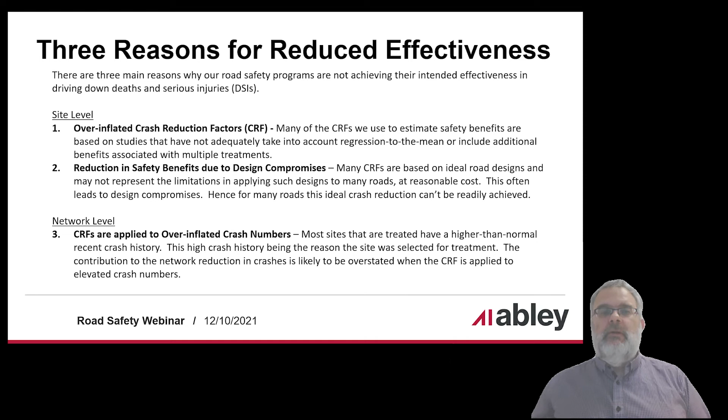And the third issue really is more at a network level, in that CRFs are applied to overinflated crash numbers. So most of the sites that we identify for treatment have higher than normal recent crash history, and we know that due to regression to the mean, the crashes will go down at those sites anyway. So while we might claim quite big reductions at those locations, they may actually overestimate the contribution that the treatment of that site makes to the overall network crash reduction, because we haven't adequately dealt with regression to the mean.

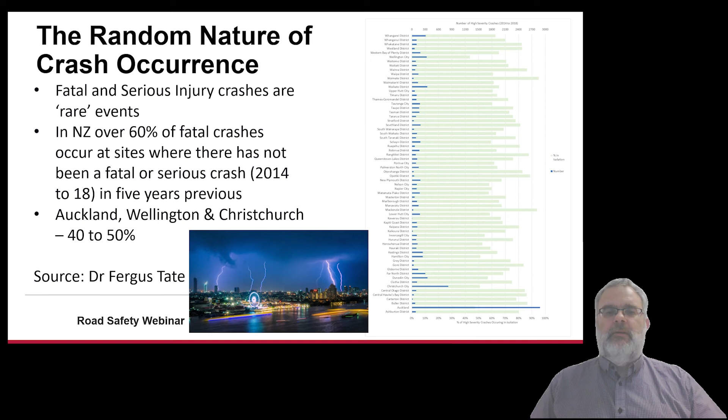So I think it's good to reflect on the fact that crashes are very random events, particularly the more severe, fatal and serious injury crashes. And so we know from some work that was done by Dr. Fergus Tate that in New Zealand over 60% of fatal crashes occur at sites which had not had a fatal or a serious injury crash in the 5 years previously. You can see that on the right-hand graphs. Other than in cities where we have some quite major intersections where we do get repeat crashes occurring, across the network a lot of our fatal crash sites appear like lightning bolts at sites where we haven't in the past necessarily seen a problem in terms of crashes.

And so we are sometimes overestimating the benefits of crash reduction measures, treatments, because we are only looking at sites which have high crash rates when we assess the benefit of treatments, and often we are applying a reduction that's unrealistic.

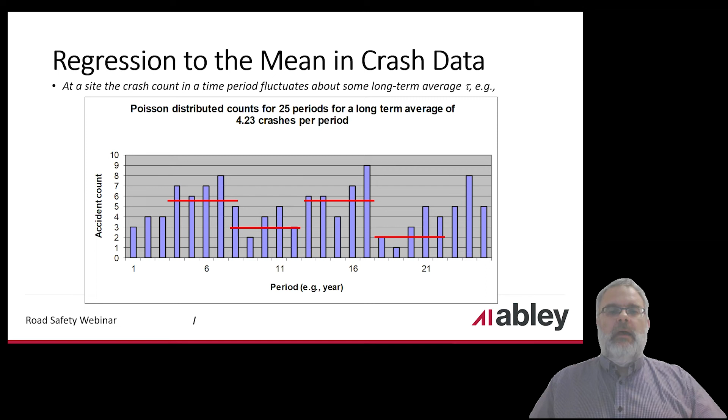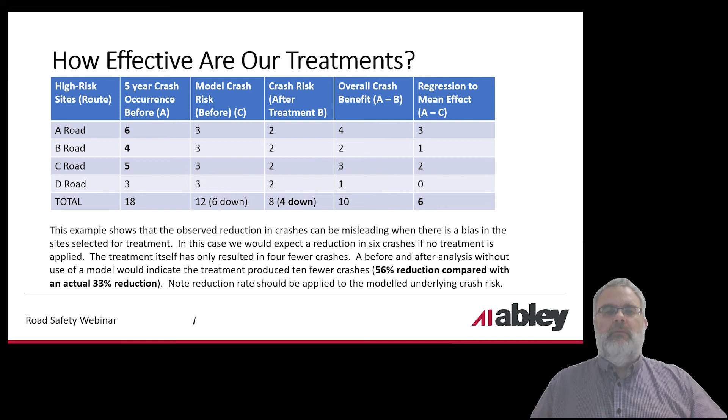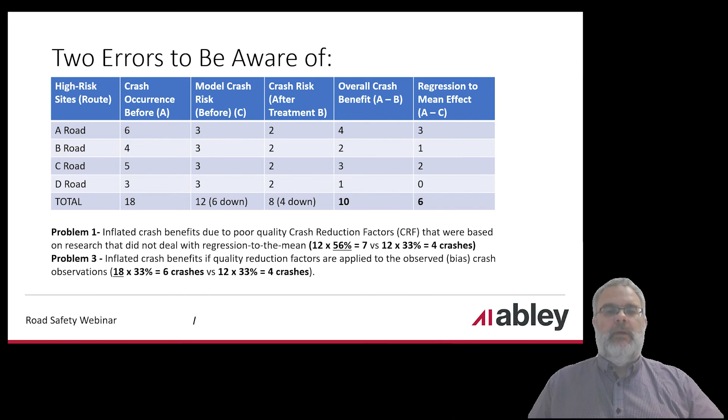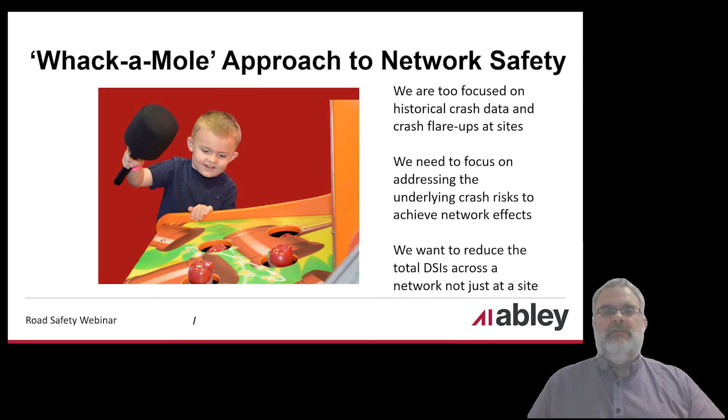And the best way to do that is to use some type of modelling method to try and understand whether the observed crashes at the site are realistic for that site, or we're seeing an overinflated number of crashes because of regression to the mean. Because overall, we want to reduce total DSIs across the network, not just at each individual site. We want to see the fatalities and the serious crashes coming down, and ideally to zero eventually across the network.

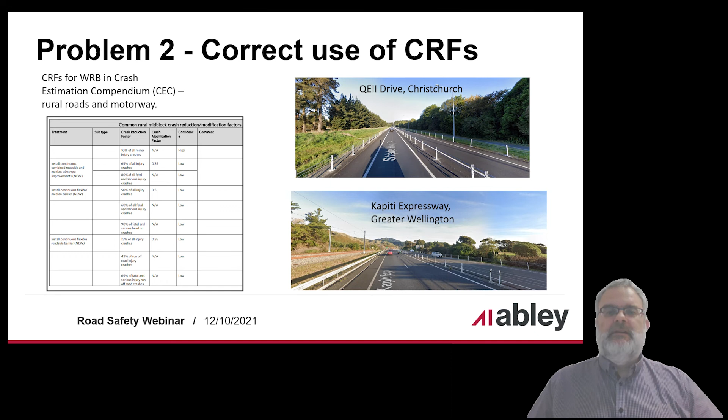And we have these reductions for putting in wire rope for median barrier and shoulder barrier, and really those reductions do apply to sections of the network where we can have continuous median and shoulders, such as QEII Drive here in Christchurch and the Kapiti Expressway up in Wellington, where there aren't accesses and intersections through that section that require you to have a gap in the median or install a major intersection.

But in reality, what we do have is locations where we do have gaps in the median, and we, for various reasons, don't put in a roundabout or some other form of control. And therefore, if we assume that we're going to get continuous benefits from a median barrier through here, we haven't really identified that there will be a reduction in the benefit and the applied crash reduction factor because of the gap in the median, and vehicles could lose control and go through that median and have a head-on crash.

And does the crash risk increase at the intersection, potentially associated with the fact that we've got a median now? And will people be U-turning through that gap? Now, in this case, the facility has been designed to allow U-turns, but in a lot of cases, it hasn't. So ideally, at all these locations, we have roundabouts, but it's not always practical to do that. And where possible, we don't have gaps in the median, and we use roundabouts or U-turn slots to aid people to access side roads and access ways.

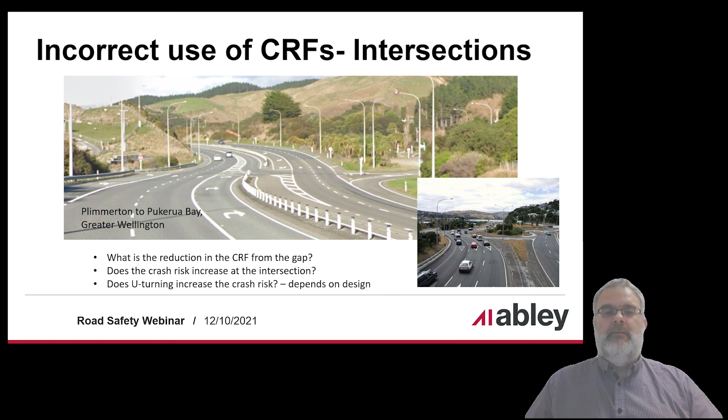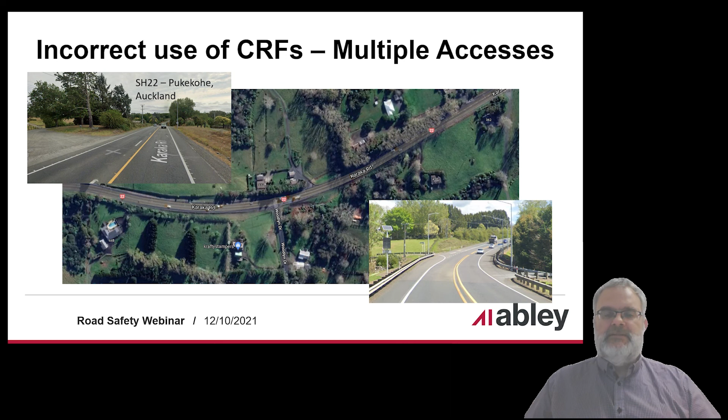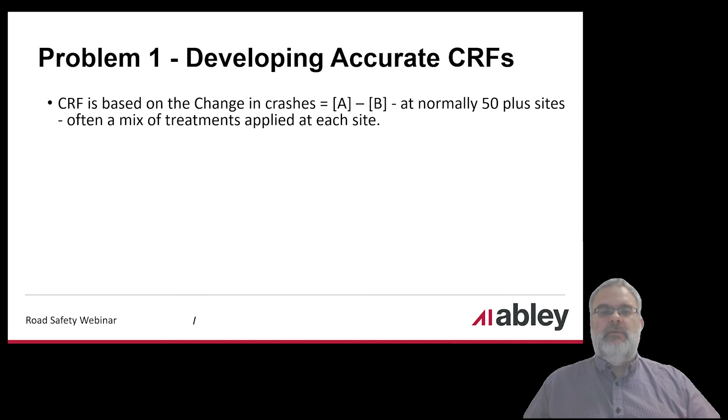So in terms of developing accurate crash reduction factors, it's really important that we use quality before and after studies. So what we're trying to do in these before and after studies is look at the number of crashes that would have occurred at the site had the treatment not been applied, and subtract from that the number of crashes we did observe at the site. And ideally, you have at least 50 sites that you do that assessment at, and then often there is that complication that you may have a mixture of treatments being applied at a site, so that your reduction observed through the analysis may not actually be just because of a particular treatment. It's probably going to be overestimated if other treatments are applied, and they have their own benefits.

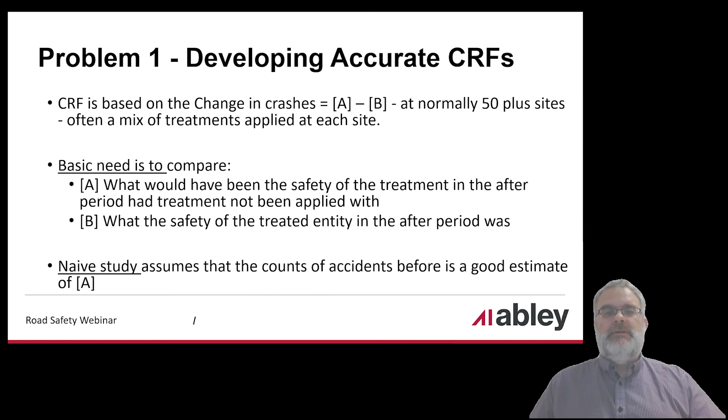So the basic needs in terms of doing the studies is what would have been the safety in the after period had treatment not been applied, and we need to know obviously from the crash record and have enough years of data what the safety effect was in the after period. Now, in a naive study, we just used the crash period in the before case to represent what would have occurred at the site in the after case. But of course, what happens in the after case may be influenced by an increase in traffic volumes or bike volumes, and this regression to the mean effect likely will have occurred in the after period. And so some of that reduction that you'll see if you just use the before data as an estimate of the after data will be due to regression to the mean if you're looking at high crash sites.

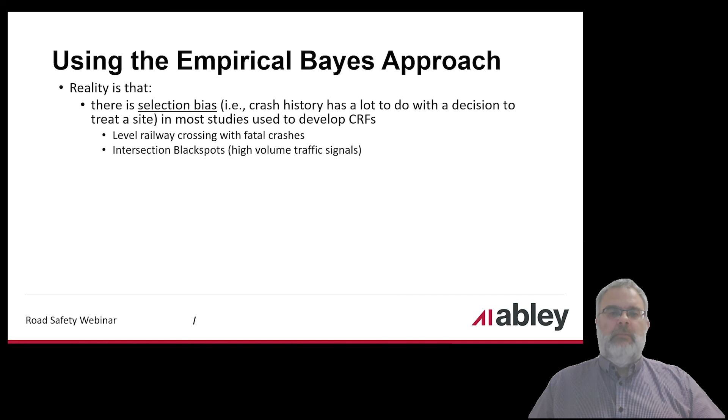So we do have this selection bias, where we have these high crash sites that generally have crash rates much higher than what we would expect at these sites, and so we do have that regression to the mean effect. And these things happen at maybe intersection black spots and at level crossings, where fatal crashes are quite rare. So at the sites where they are occurring, that crash may not reoccur every 5 years for the next 25 years. It might just be a 1 in 50 year event.

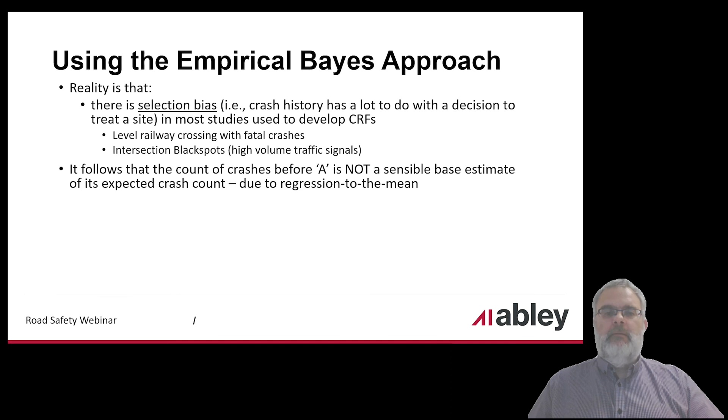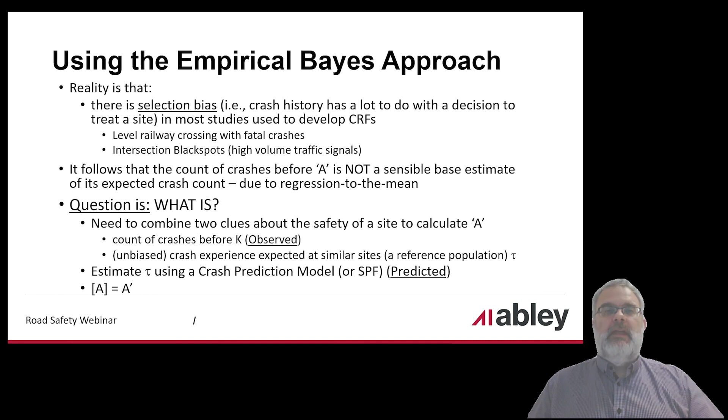So it follows that the count of crashes in the before period is not a sensible base estimate of the expected crash count in the after, due to regression to the mean and changes in traffic volume and bicycle volume in the after period. So what is? Well, the way we do it is we take both the observed in the before case, and we also use what we'd expect in the after case based on similar sites. We're using a crash prediction model or safety performance function, combining those two bits of information together to estimate what the number of crashes might have been in the after case had the treatment not been applied.

Now, why don't we just use the predicted frequency? Well, there may be factors at that site that are reflected in the crash history, and therefore the underlying crash rate may be higher at that site than all the other sites that have that similar volume and characteristics. So we do acknowledge that some of the increased crash risk that you observed to be above what you predict or would expect may be due to site factors.

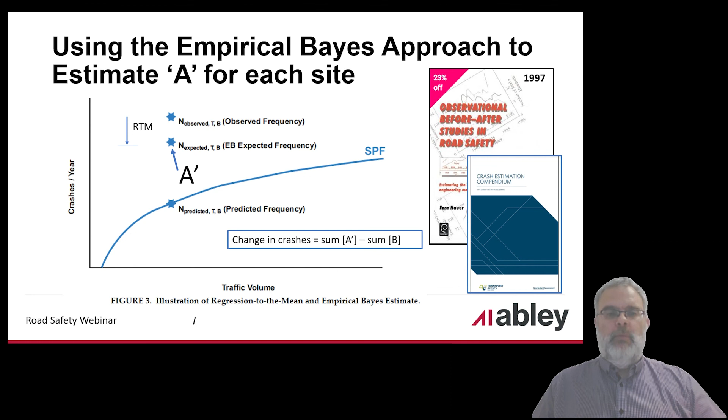But we are taking into account regression to the mean, and considerable research has shown that this approach does improve the accuracy of the crash reduction factors that you will develop for use in appraisal of road safety programs. So it's really important that the studies had done this adjustment, and the empirical Bayes method, which is this weighting method, is the way to go.

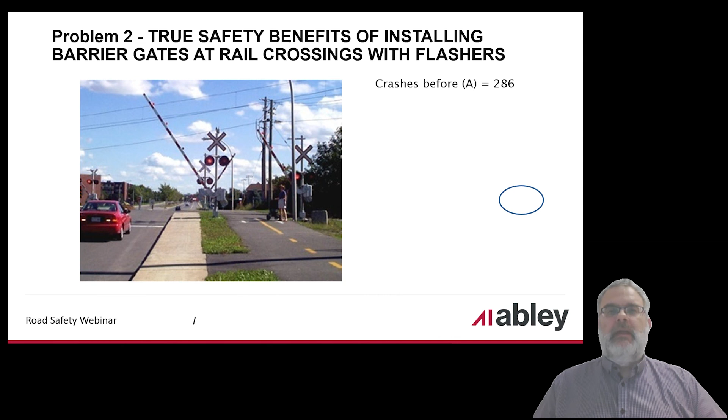So I'm just going to go through one example here of what can happen if you don't take into account regression to the mean, and how you can be off in terms of your estimates of what the crash reduction factor will be. So this is based on some research in North America, and in this case they were looking at the true benefits of installing barrier arms at rail crossings with flashers. And of course they identified a lot of sites where they had actually had fatal and serious crashes, so there was that bias by selection.

So in the before case they had 286 fatal and serious crashes at all these sites. And then they observed at these sites in the after period only 114 crashes. So the apparent saving is 172 crashes, or a 60% reduction, so a big reduction. But in reality, when you use the empirical Bayes method, the crashes expected in the after case had the barrier arms not gone in was more like 208 crashes.

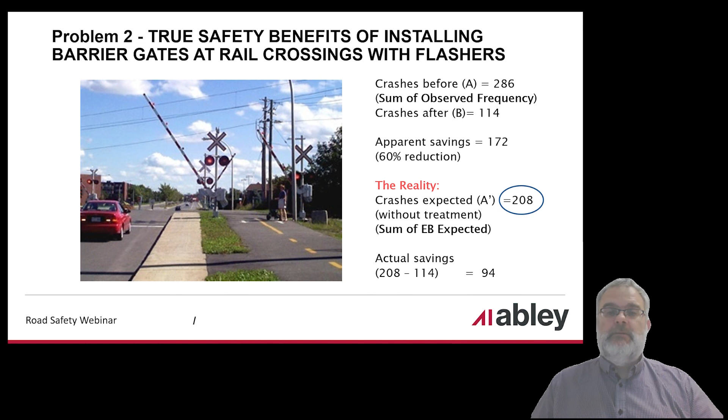Take into account that at some of those sites, the crashes that were observed were unlikely to reoccur in the after period. It was because of regression to the mean that the number of crashes at some sites was higher than expected. So the actual savings were more like 94, which is quite a lot less than the 172 that would have been estimated using the naive study of taking the before crashes as a representation of what would have occurred if the treatment hadn't been applied in the after case.

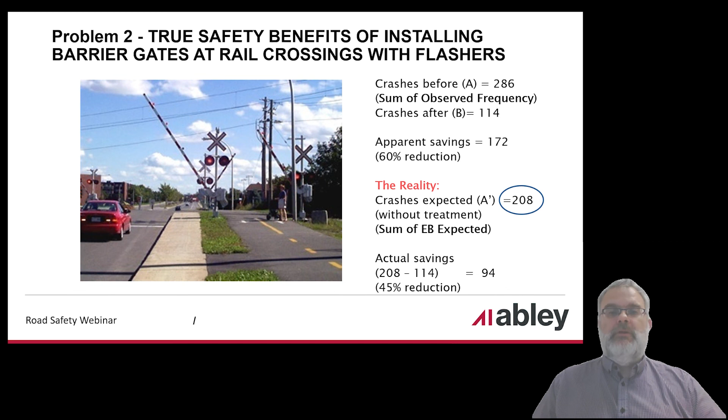So the reduction was more like 45%. And you can see that's quite a big difference. And if you use the 60% at your other sites that you're treating, you'll end up overestimating the benefit. And then when you come back to evaluate those sites, you'll find generally that the reduction wasn't as high as you expect.

Because I suspect what happens at the moment is the benefit is reduced in proportion to the amount of barrier that's not actually applied, but there are issues like U-turning that may occur in these gaps in the median, which may actually increase the crash rate. So we do need to look at how effective putting in shoulder barrier and median barriers with an intention to make it as continuous as possible is on these types of highways, and identify any safety problems that are caused by leaving these gaps in the median.